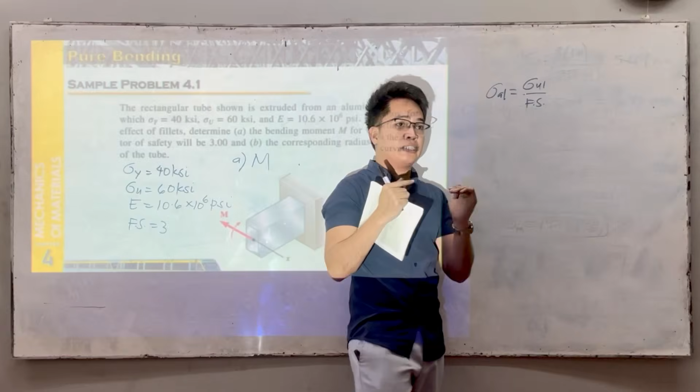This is Sir Engineer AJ, and welcome to Chapter 4 of Strength of Materials, Pure Bending, Part 1 of 11. Symmetric members in pure bending.

Sige, let's have this one. We have pure bending. So far sa chapter 1 at chapter 2, yung diniscuss natin ay yung in-apply natin na load, axial — ibibira natin to, or kinokompress natin. Sa chapter 3 naman, yung diniscuss doon ay torsion — instead na hilahin at itulak, iti-twist natin.

Ngayon, sa chapter 4, i-bend natin yung material — ganito. So ano yung stress o mga variables na makukuha o dapat nating malaman kapag mag-a-apply tayo ng bending? May iba't ibang klase ng bending na i-discuss natin dito sa mechanics, pero para sa chapter na ito, ang topic lang muna natin ay pure bending.

Kasi meron tayong bending na, halimbawa, i-bend ko to, tapos lalagyan ko pa ng transverse na load, at hihilahin ko pa papunta doon — iba na naman yan.

Ang i-discuss natin ngayon ay pure bending lang — ibig sabihin, bending lang yung nag-e-exist. Wala tayong nilagay na force na pag ganito o papunta doon, o anumang axial at saka transverse load na additional. Pure lang talaga na bending.

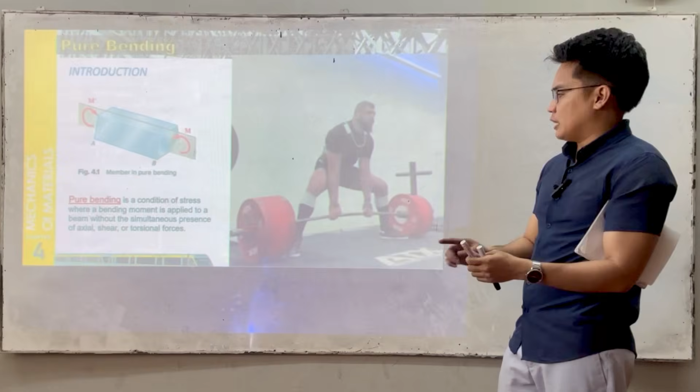Bending is caused by a moment. Halimbawa ito — yung weightlifter natin ay mag-a-apply ng force upward, at yung barbell naman ay mag-a-apply ng downward force dahil sa gravity.

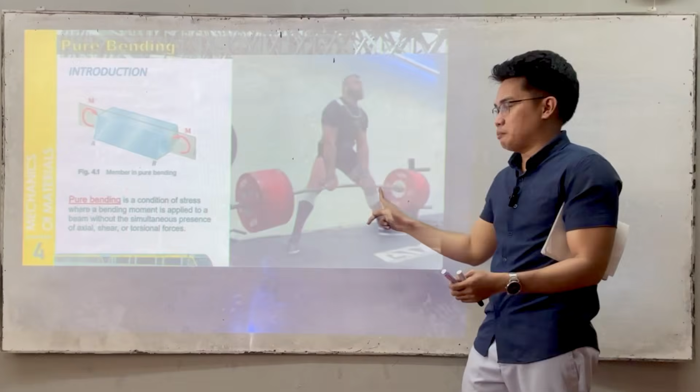So that downward force ay magkre-create ng bending doon sa bar — hindi sa buong barbell, kundi sa bar mismo.

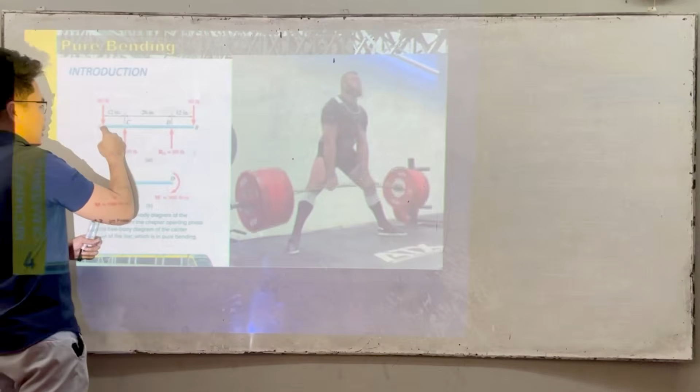Weightlifter — sige, ito yung example. Nag-a-apply ng upward force yung weightlifter, at yung weights naman natin dito ay mag-a-apply ng downward force dahil sa gravity.

Kung kukunin natin yung bending natin dito, somehow pwede natin itong ma-simplify into dalawang couple moment. Halimbawa, kapag yung force natin ililipat natin papunta doon, ano yung madadagdag? Moment.

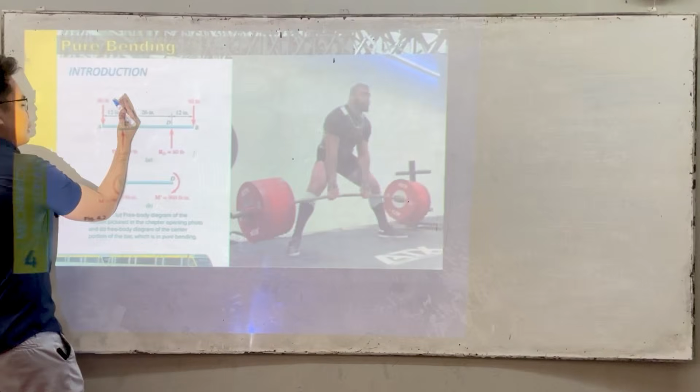So moment mula dito, yung direction ay counterclockwise. Ngayon, itong force at saka itong force, magka-cancel out sila, kaya yung matitira dito ay moment na lang. So somehow, itong image na ito ay makakagawa ng simplified version na ito.

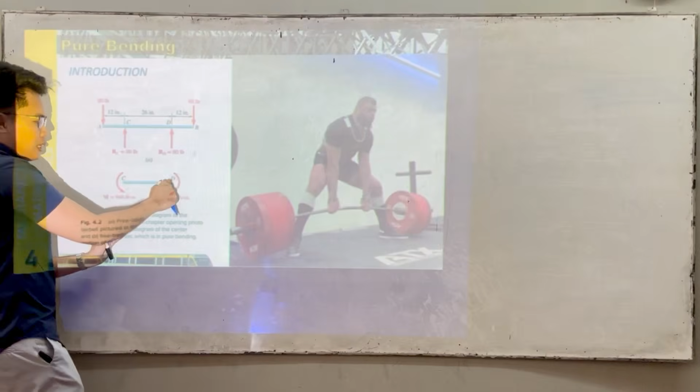Sa bar na ito, meron tayong couple dito at dito — ito ang pure bending, ito lang muna ang i-discuss natin, kasi meron pang ibang klase ng bending. Kung hindi pure, meron tayong tinatawag na combination ng bending at axial.

Kasi ito yung mga i-discuss natin: pure bending, combination ng axial at bending, o combination ng moment lang — bending, pure bending, moment lang.

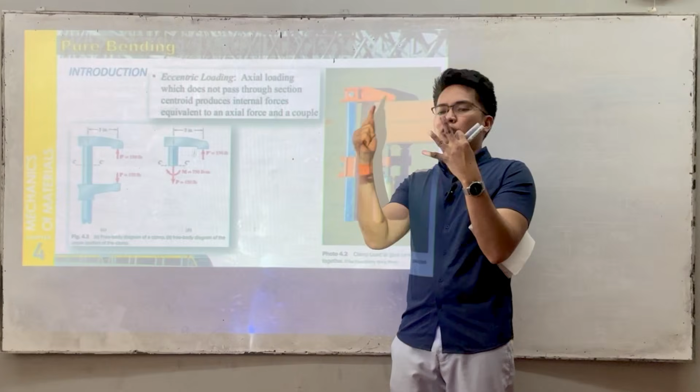Dito, moment at axial; dito naman, moment at transverse load. Kaya yung example ng pure bending ay yung weightlifting, at yung example ng combination ng moment at axial ay ito — halimbawa, meron tayong clamp.

Pinaipit ko to, at gagawa ito ng force dito. Kung i-analyze natin itong portion, i-cut natin dito — makikita natin na itong force na ito ay gagawa ng rotation.

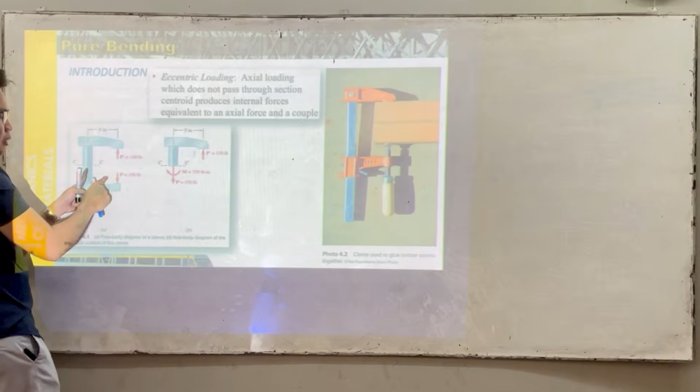Para ma-counter yan, dapat meron tayong clockwise moment — kaya meron tayong moment dito. Kung ililipat natin ito, may madadagdag tayong moment para ma-counter, na clockwise.

Kaya sa portion na ito, dalawa yung nag-e-exist: axial force at saka moment — ibang discussion na naman to. Sunod naman ay ito.

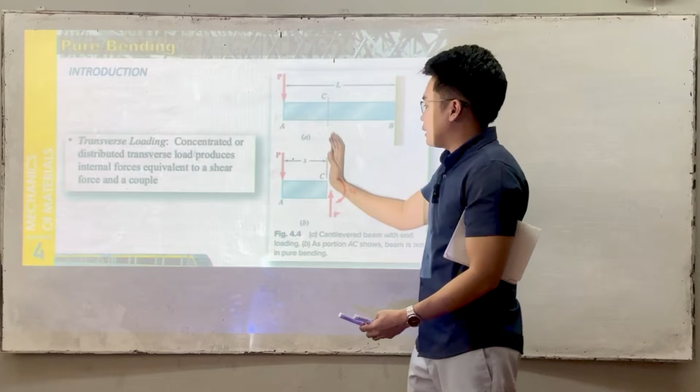Moment with transverse loading. Halimbawa, cantilever beam, mag-a-apply ako ng force dito. Kung i-analyze natin itong portion, meron tayong moment at transverse load dito.

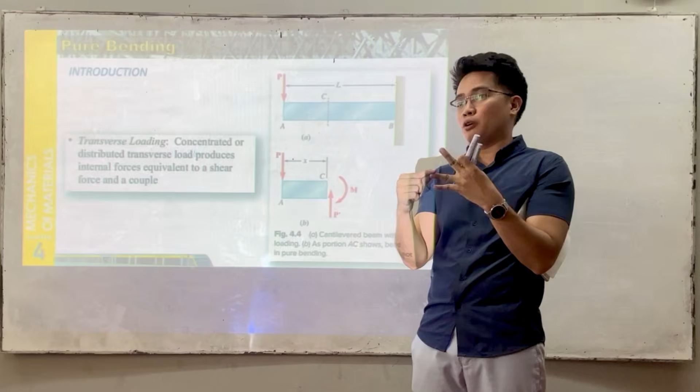So ayan, tatlo yun: pure bending; combination ng eccentric loading, na combination ng axial at moment; at saka transverse loading, na combination ng moment at transverse load. Pero sa chapter na ito, pure bending lang muna tayo — later na yung topic na yan, parang chapter 9 pa yun, sobrang layo pa.

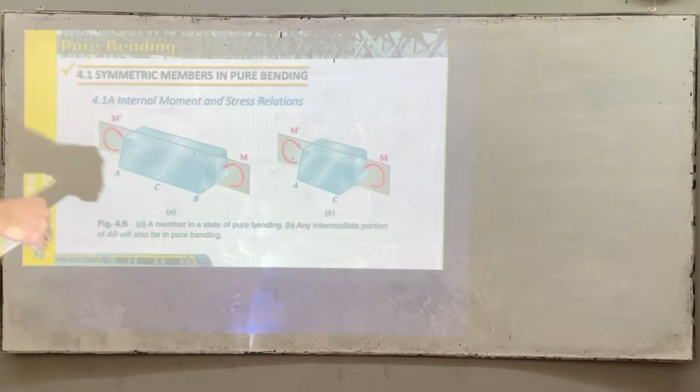So, in analyzing pure bending systems, we assume that we have a plane wherein the couple moment is applied on that plane. And that plane here is symmetric. The cross-sectional area, if you look at it from the side, is symmetric. So that's our assumption here.

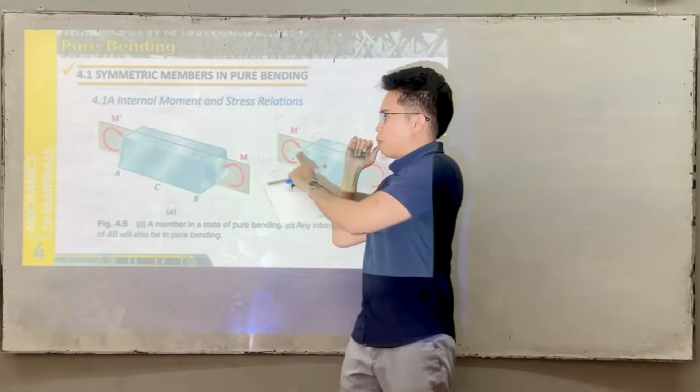Now, since the systems we analyze in mechanics are in static equilibrium, if we cut this portion in half, since this one is in static equilibrium, it should be that if we cut it here, this side is also in static equilibrium. So if we cut here and there's a moment, there should exist a counter moment too. Therefore, what we see internally here is also a couple or a moment.

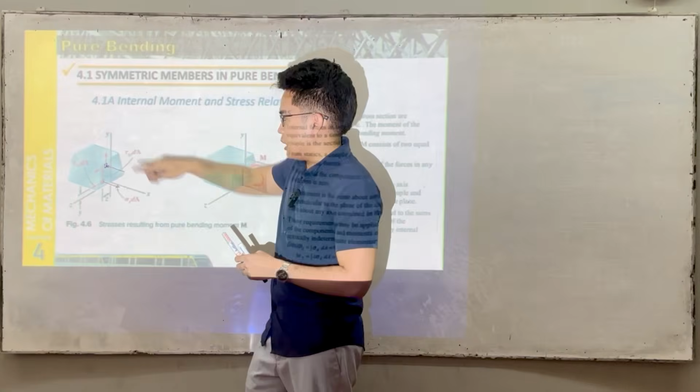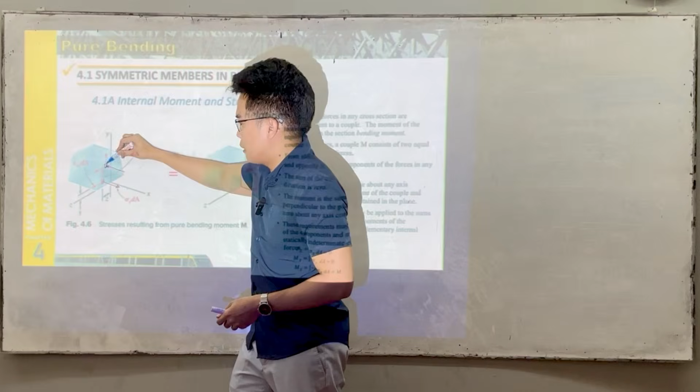So there, because we have forces that we can see internally if we cut this. Take for example, we have an elemental area that we took here. If we look at it, there's a force going that way, and also a force going this way. If you see, the force going that way is compression - because when we bend this like so, the top portion gets compressed, and the lower portion gets stretched, so that's tensile. Assume for now that all these forces exist here - we have compression, shearing in the positive y-direction, and shearing along the z-axis.

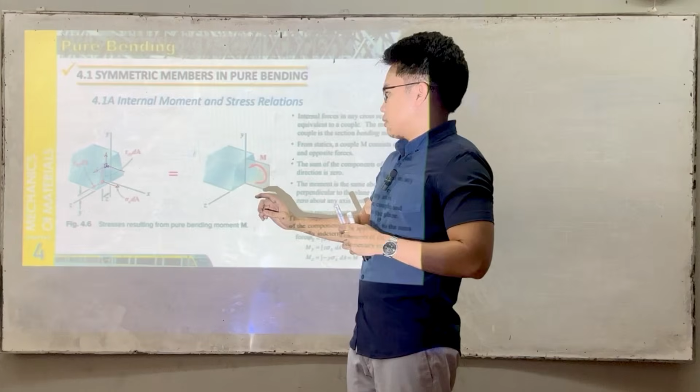Now take note, in order for this illustration to exist as shown, what do you notice here? We don't have forces along Y, right? We only have a moment. We don't have forces along Z, correct? We don't have forces along X. You'll see we only have a moment along the Z-axis.

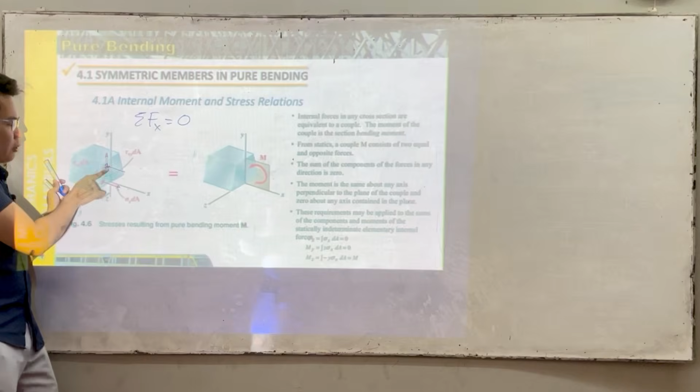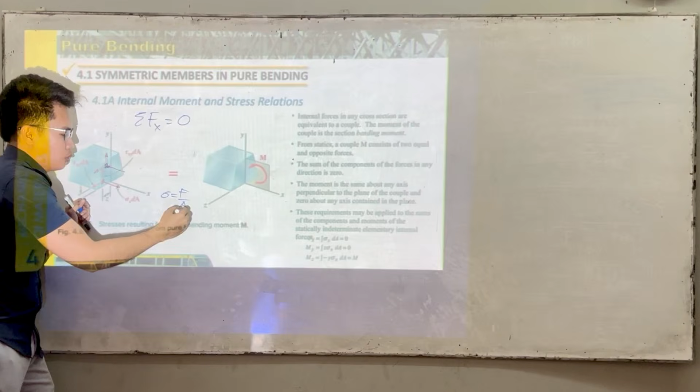So if you see here, the summation of forces along X should equal 0. So if we look at it internally, what are the forces along X? We know that stress equals force over area, right? If we use an elemental area, stress is just equal to dF over dA, very small. Therefore, our dF is equal to stress times dA.

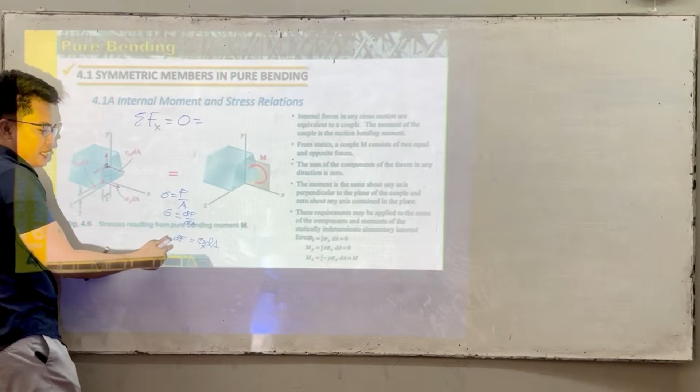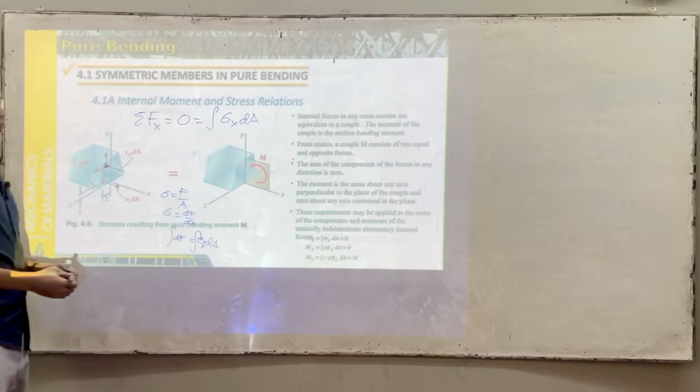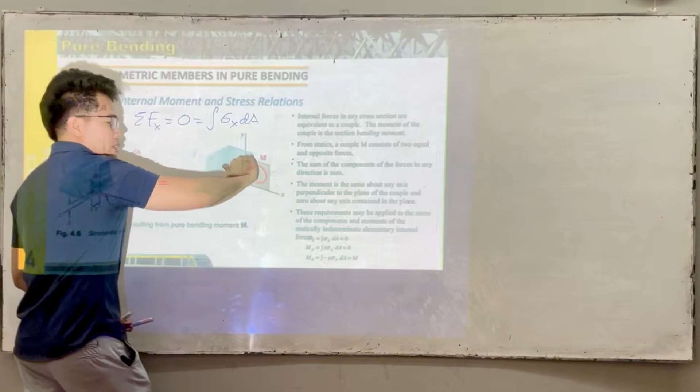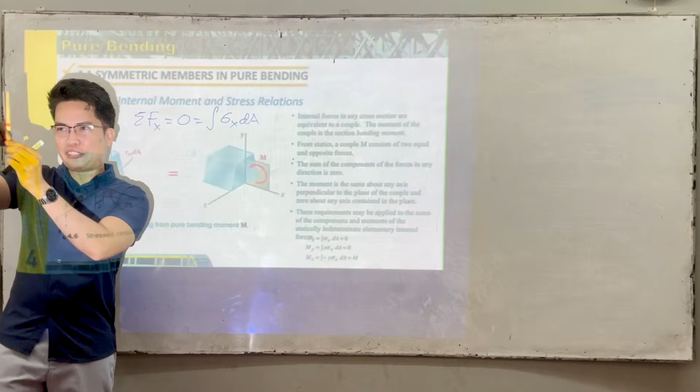Now how about - you see here, we only have a moment along z. How do we create a moment along z? If this is the z-axis, how do we create a moment along z? Our force should go that way, then our moment arm is like this, right? Can you imagine it? So to create a moment along Y, the moment arm should be along X or along... I mean, along the Z-axis. To create a moment along the Z-axis, the moment arm should be along X, so we get it this way, or along Y to get it that way.

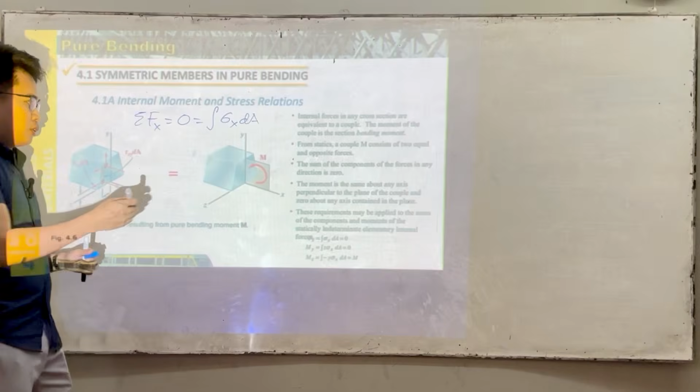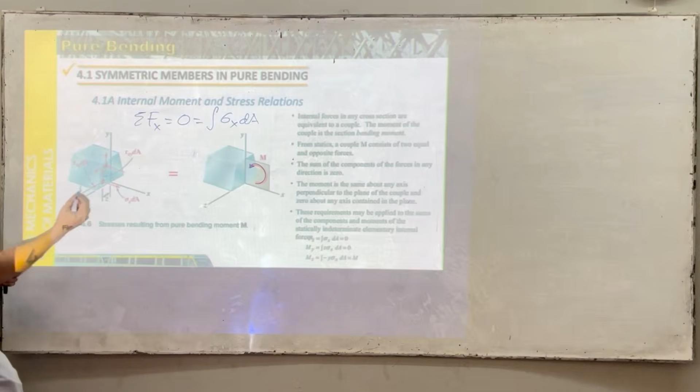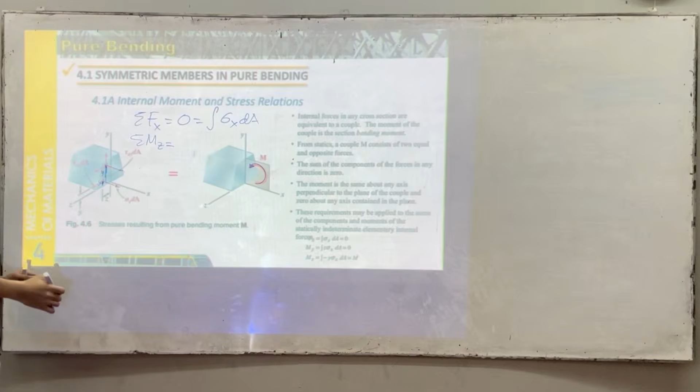Now take note, our moment here is along what axis? Along the z-axis, right? So given that, what are the moments we have here? If we look at it, the moments that create along the z-axis are these forces. So what's their moment arm? Their moment arm is along Y, right? Along Y. So if we sum them up, summation of moment along z-axis - since this is static equilibrium, whatever result we get here should equal that.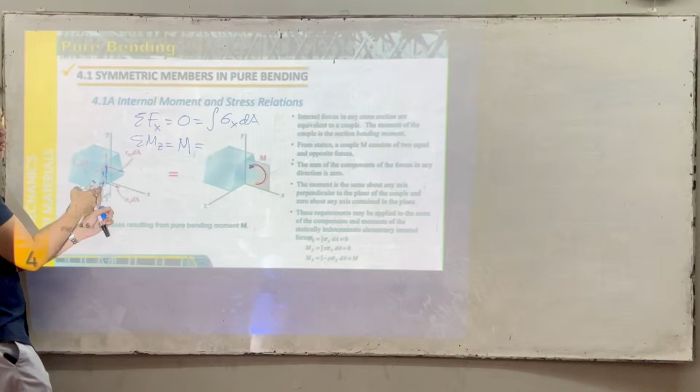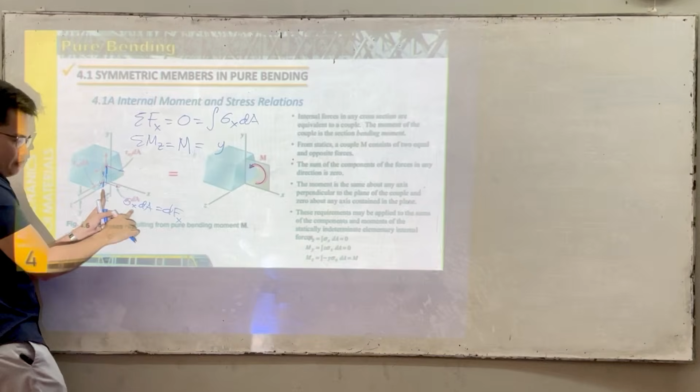Now what is our moment along the z-axis? Is it 0? No, right? We have M. So the summation of moment along z is M. Now what is that? If you see here, that is y times the force, which is sigma x dA - that's our dF along x that I wrote earlier. So therefore, what's the moment again? We have y, the moment arm, times the force, which is sigma x dA. If we sum all of that up, that is our F... I mean, that is our equation. So this is another equation we'll use later. That's it for now.

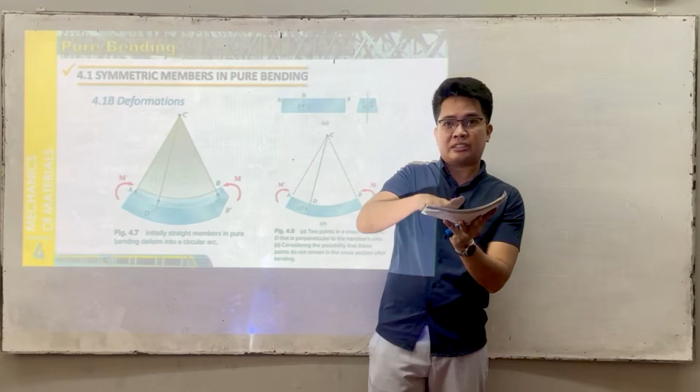So, ayan. Now, this is our image of bending a material. Take note, when we imagine the material bending, somehow the curvature of the material is like part of a circle. It's an arc, wherein we have a radius of curvature.

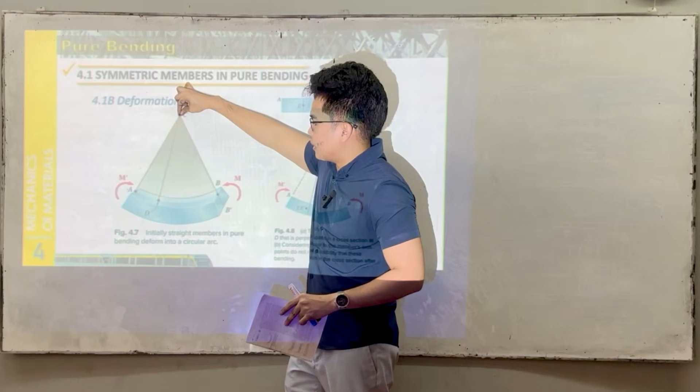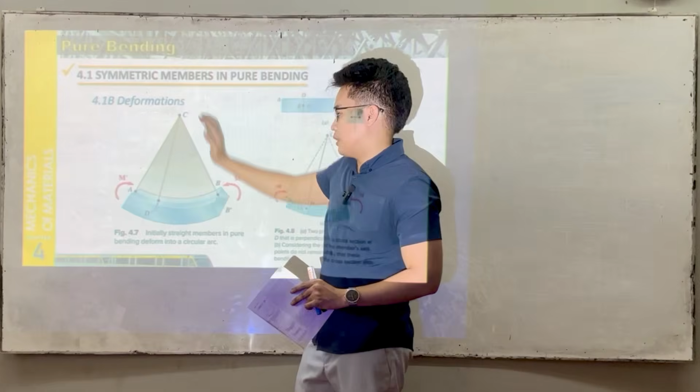The radius of curvature we imagine is like this. The center of the radius of curvature is such that, if we slice the beam, when we extend those slices, they should intersect at one point.

Also, when we bend this, the slicing of our beam should be such that it doesn't bend itself. We can observe this, for example, looking at the top view. In the top view, let's say we have point D. So the condition is that when we cut our beam into this, when we extend it, it will intersect at point C.

At that point, it's not straight such that it intersects at a different point. The proof is that when we bend this, our point D will remain on this line. Because if our D is either on the left or right, when we intersect it, it will no longer intersect at our point C. It's simple.

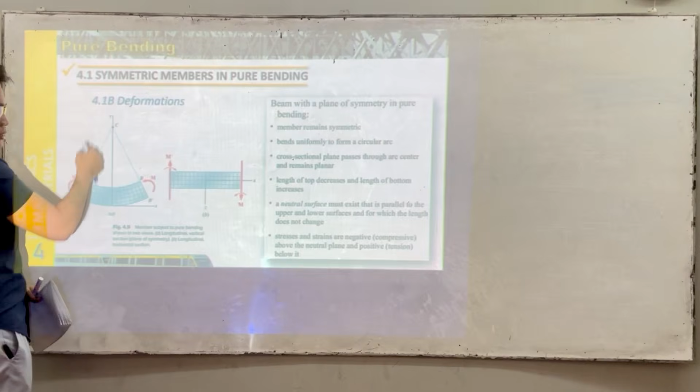Okay. So that's what I said earlier. When we bend the material, somehow we form part of a circle or our arc. So take, for example, this line. This line here, JK.

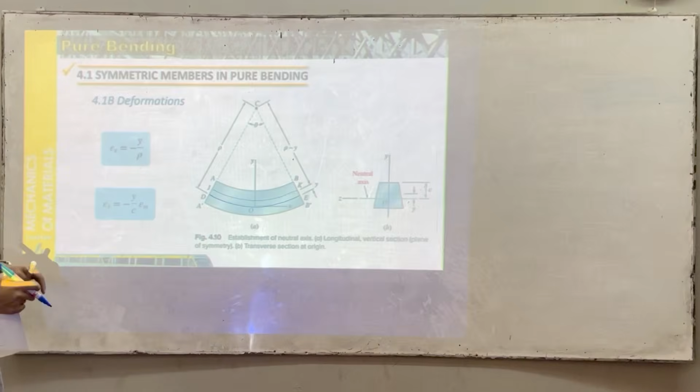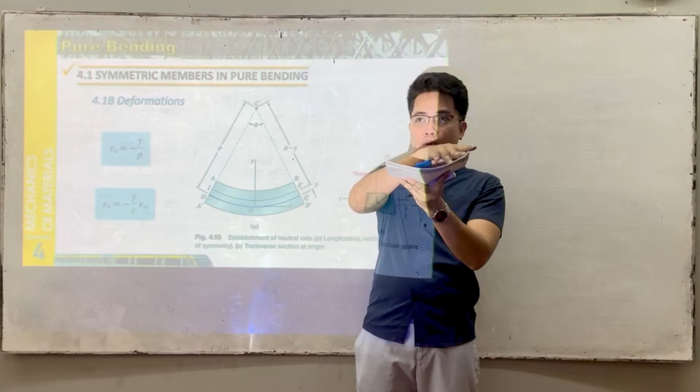Let's compare DE to our JK. Take note, in bending the material, I said earlier that when I bend this, at the top portion it gets compressed, and at the bottom portion it gets stretched. But there is a specific line here that doesn't experience compression or tension.

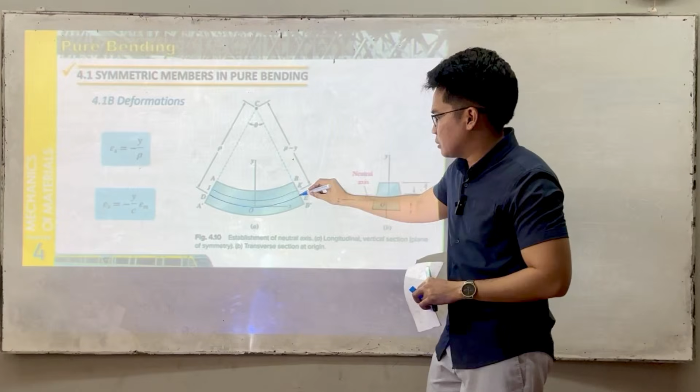So let's name this line. Let's say this line is our neutral axis. What is the neutral axis? That is the point or line in our material that doesn't experience compression or tension when we bend it.

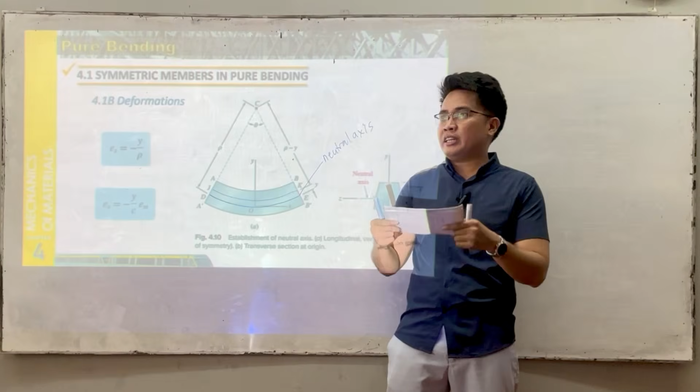So now, I said earlier that when we bend this, the top gets compressed. If it's compressed, doesn't the length decrease? So at this point, our JK, if this is the neutral axis, JK will shorten, will be compressed. So if we have a line that is compressed, there's a deformation happening there, and that deformation is negative.

Let's get the deformation along JK. How do we get it? First, let's get the length of DE, the arc DE. Let's say our radius of curvature is this rho.

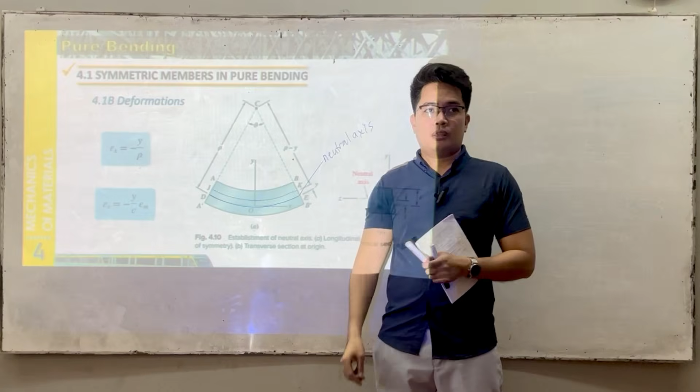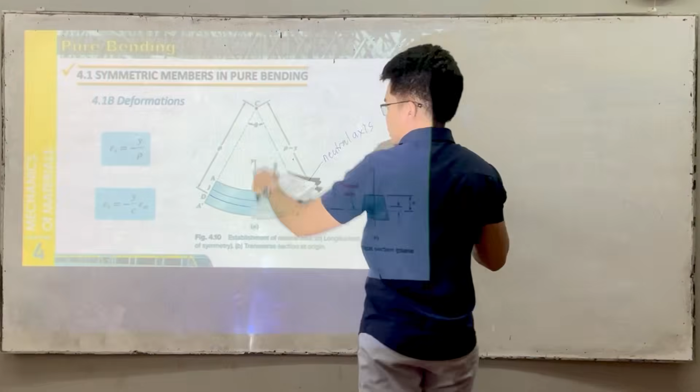How do we get the length of DE? It's the length of arc. What's the formula for length of arc? Radius times the angle. Let's call our angle here theta. So our DE here is just rho times theta.

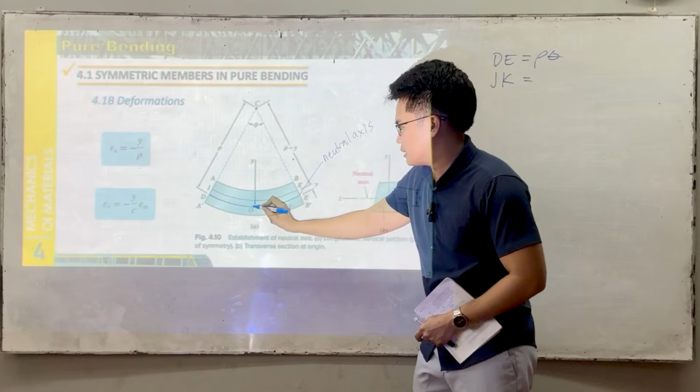How about JK? What's the length of JK? Let's say this is our x-axis, and this is our y-axis like this. So therefore this distance here is our y, along the y-axis. So this distance, this is our y.

So how do we get the length of JK? What's its radius? Radius times theta. So what's its radius? If the whole is rho minus y, that's its radius. So we have, the radius is rho minus y, times theta.

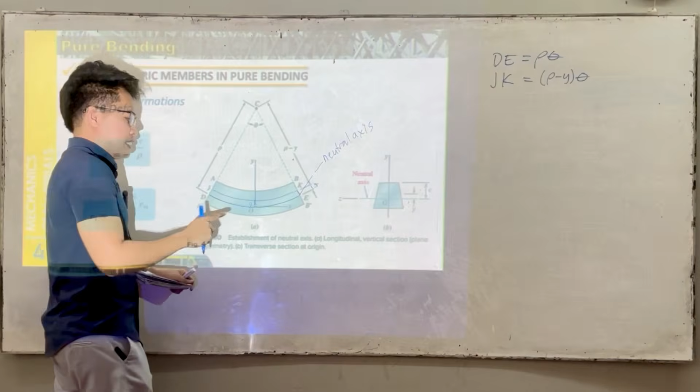Now, before it was bent, our JK was of the same length as our DE. Right? The same length. When we bent it, it shortened. So when it shortens, what's the deformation? It should be that the original minus the final.

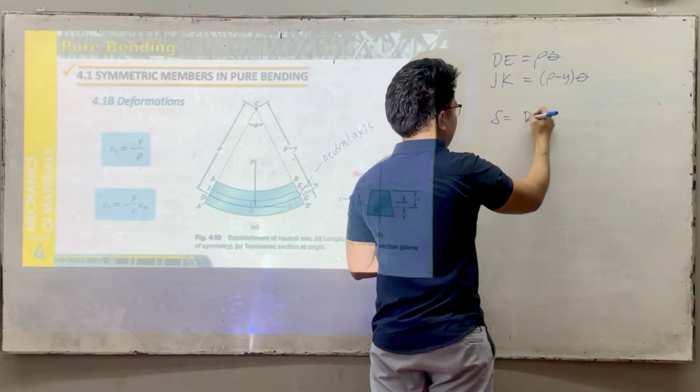What's the original? It's the DE. What's the final? This one we got here. So to know the deformation, that's just the original length, which is DE, minus JK. What's DE? We have rho theta. What's JK? We have rho minus y, times theta.

This is the deformation. If we solve this, it's rho theta minus rho theta plus y theta. Cancel out. The deformation is y theta.